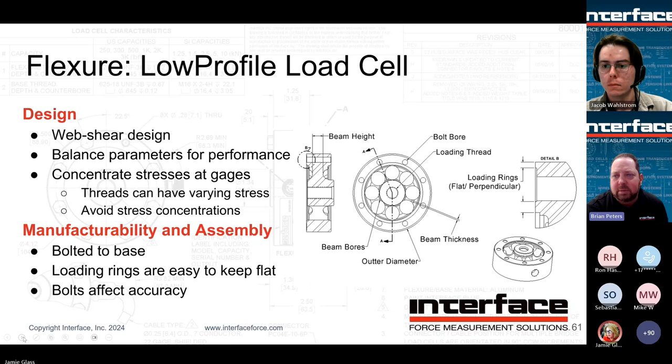So obviously we reach a certain point where we have to grow the diameter, and then we fit another range of capacities within that, and that's all through changing the internal dimensions of the beams. Good point. Thank you, Brian.

Alrighty, so now we're going on to the LBMU. And this is a load button. And load buttons, as Brian mentioned before, get a bad rap. They have their pros and their cons. Load buttons don't transfer moments to the beam, right? There's no fixed point of load application, which doesn't transfer moments, but it also can cause some linearity issues if you're applying the force in a different location than what was intended. And that makes these load cells very, very sensitive to gauge placement.

So you can see some rough dimensions here. This is a really small load cell, right? It's, I think, smaller than a quarter, maybe smaller than a penny. It's pretty small. And you can think about trying to install 4 separate gauges in very specific spots repeatably.

And that's going to be really hard to manufacture. It's going to be really hard to have good, consistent performance. So since Interface makes our own strain gauges, we were able to make an all-in-one. This is also called a patch gauge, and this means that the tension and compression gauges relative to each other are in the same location every single time, and the technician only has to install one patch. So this helps these load cells perform as best they can, and also be a cost-effective cell to manufacture.

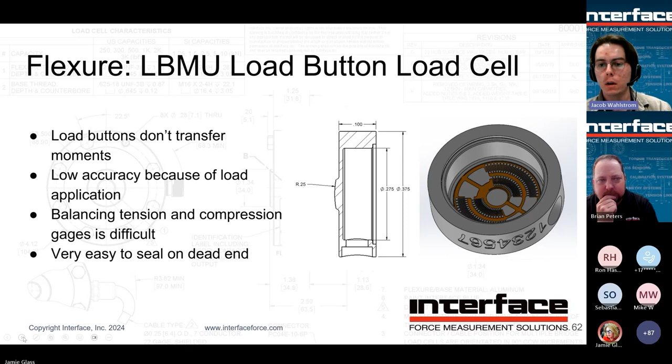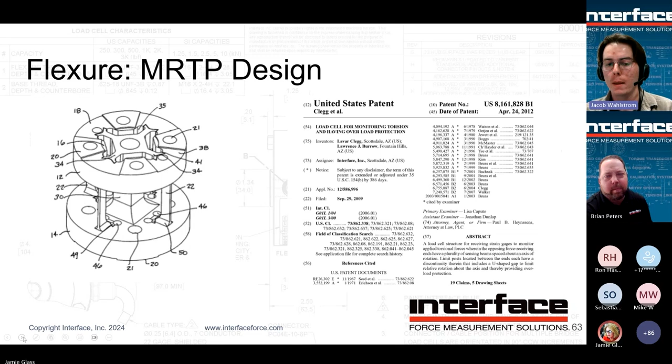Alrighty, so next slide here. Now we got the MRTP. So this is Interface proprietary. We got a patent on it by Lavar and Mr. Burrow there. And next slide, please.

This one is measuring torsion, torque, and it is overload protected. So you can see there that kind of blue highlighted surface. That is attached to a column that's going down the middle, and it has those arms that kind of go out with those EDM slots. And those EDM slots are overload gaps. So the load cell is allowed to deform a certain amount, and then it contacts those surfaces and can't deform anymore, and it's overload protected.

So this is really important for low capacity load cells because they're very easy to overload, right? Even handling it or installing it, torquing down some bolts to apply the load, you could very easily overload it. So this is a really, really good design, and you can see the raised surfaces there too. That's what helps keep the live end, the load application of that outer ring, from touching the dead end overload stop column. And another beneficial aspect of this is the beams are on the outside, so they're very easy to access for gauging and wiring.

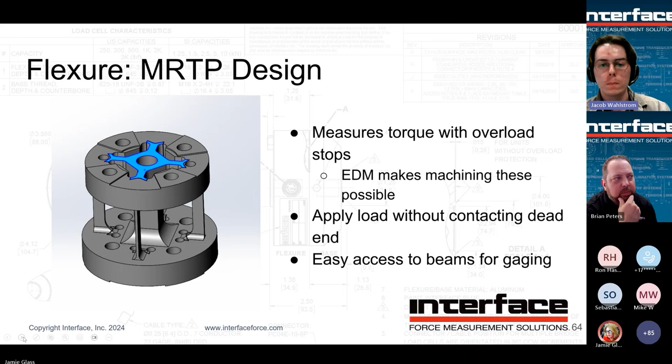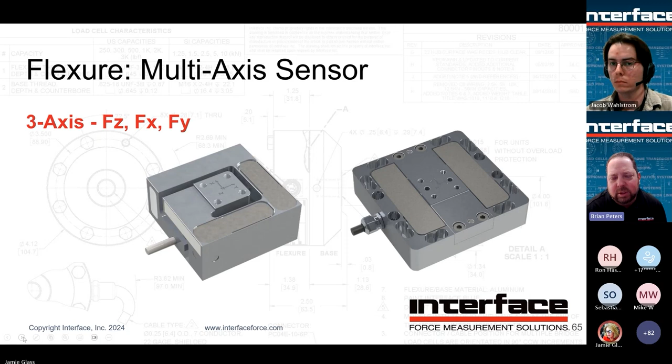So it works. There might be some compromises in terms of deflection, stiffness, as well as maybe introducing a little bit higher crosstalk, right? Because every single element there is going to respond to that force. So that's one way to do an FZ XY shear, is to have them all connected. The one on the right there has a center section that's bolted in to discretely measure the vertical, and then it interacts with two different sections beneath it to then be able to transfer the X and Y. So it's just a different approach there, whether they're all in one or isolated as much as possible from a multi-axis standpoint. Next slide.

So here's an example of our 6-axis sensors. These are obviously full axial as well as bending moment solutions. These are a little bit unique in that instead of having a discrete output where each channel gives you specifically an FX value or an MY value, there are 6 or in some cases 12 millivolt per volt channels coming out. And the reason for that is internally there's various beams, pretty representative in this drawing here of what it looks like. Often called a Stewart platform or a hexapod, but each one of those beams will have strain gauges on it, will have a bridge on it. But it's not necessarily designed that each one of those beams is going to measure and provide the output for those different axes you're looking for, right?

So instead you get a composite output with everything, and through calibration and characterization of the sensor, and then typically through calibration matrix adjustment on the instrumentation side, which is why we always recommend one of our BX8 amplifiers with these units, so you don't have to do the math yourself, you can then isolate and calculate out what the discrete outputs are for each axis that you're trying to measure.

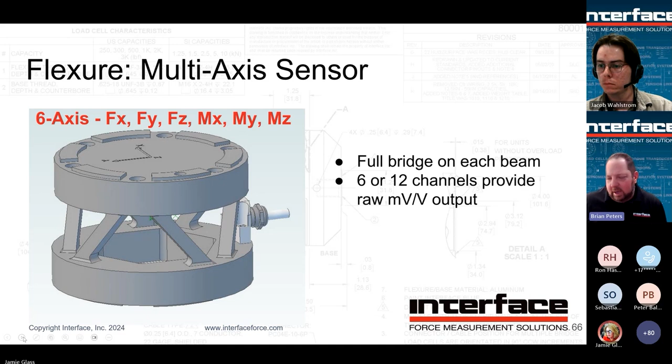So here's an example of, again, a multi-axis where instead of having a bridge that is specific to the axis of measurement, you have many different millivolt per volt signals coming out, but through very careful and accurate calibration, you can characterize how a specific applied load impacts each one of those millivolt per volt signals, and then be able to run that into your instrumentation.

All right, next. So load pins. Load pins are typically hollow pins, so the center of the flexure will be drilled out. The flexure design is going to be a function of the application dimensions typically. Most load pins sold are custom, in terms of either the diameter or the length or where the loading surfaces are for that setup.

But the key takeaway there is they come in two flavors. They're going to come in either an internally gauged solution or an externally gauged load pin. The externally gauged are going to have much bigger exposed pockets. They usually have to be potted or in some cases welded. But Interface primarily offers internally bonded solutions for load pins, much more rugged. We can seal off the ends of the load pin and protect the gauge cavity.

But the important thing to note here is that the flexures are very sensitive to how they're loaded. On the left there is a good depiction of what we would recommend for good performance. We don't want to bend a load pin. We want to keep it in double shear. So that means that the reaction surfaces, as depicted by those outer two elements, want to be tightly controlling not only the diameter aspect, but also the interface to the middle loading section.

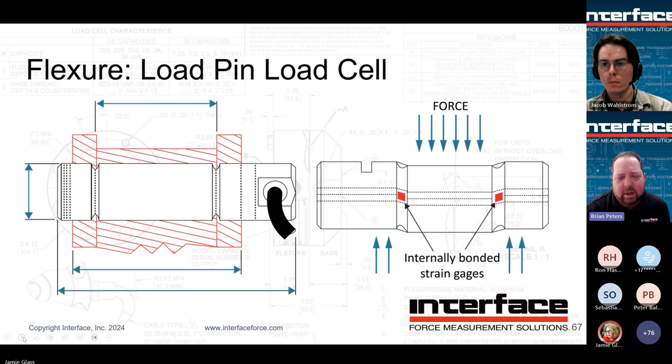So as you push or pull that middle section up or down, you want to make sure of the stress concentration areas depicted by the grooves. Again, if you reflect back to some of those other flexures where we neck down the material so that we can maximize strain, same thing going on here. The gauges are going to be directly under those grooves, and that's where you want to have that double shear interface occurring from a system level standpoint. So it's really important you have tight tolerance, that you keep the pins in shear, and that you don't bend the load pins.

All right. Next. Sealing. Alrighty. Back to you, Jake.

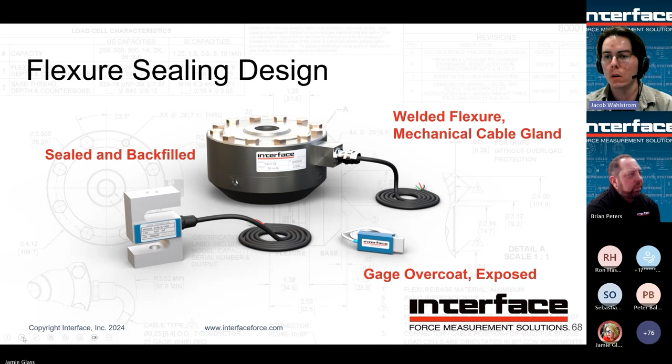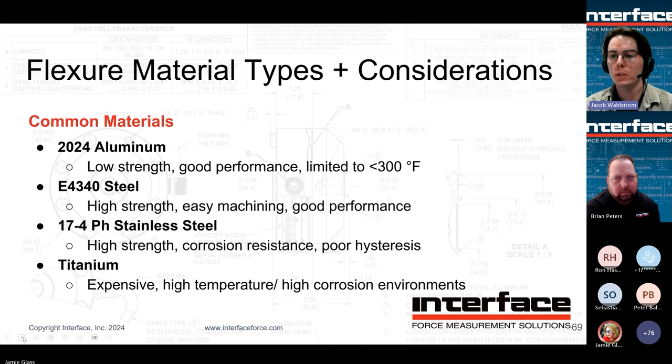If you're looking for corrosion resistance, it doesn't really get better than 17-4. It's very corrosion resistant and has very high strength, but it has worse hysteresis than a 4340. So there's always going to be drawbacks and weighing the pros and cons. And there's all sorts of other materials you could use. Titanium is one that's used for highly corrosive environments and maybe very hot situations where you still want an accurate reading. The obvious drawbacks there are that it's very expensive and very difficult to machine, so it's very, very rare.